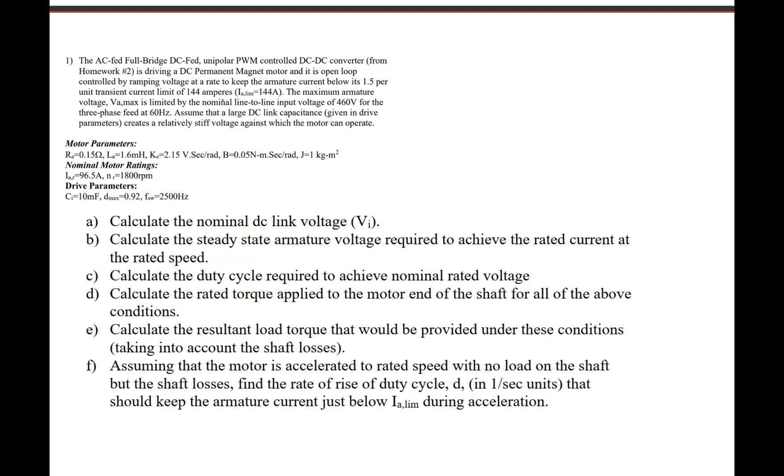When we want to limit the armature voltage because of the front end AC voltage, we can't exceed that, and we'll also want to provide some dynamic margin so that when we apply closed loop controls we can achieve everything that we need without saturating the PWM controls.

Now we also will be assuming a very large DC link capacitance. We provide that parameter right here at 10 millifarads. So that would create a fairly stiff voltage against which the motor drive can operate. So we have these parameters here, and we have these nominal ratings, and then we have these drive parameters.

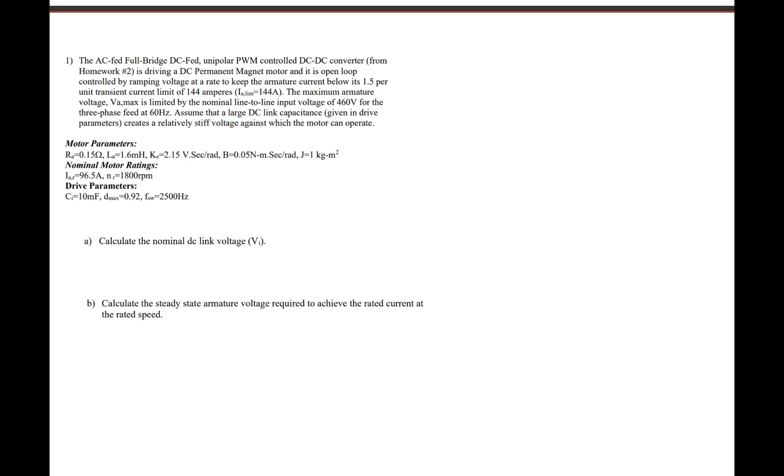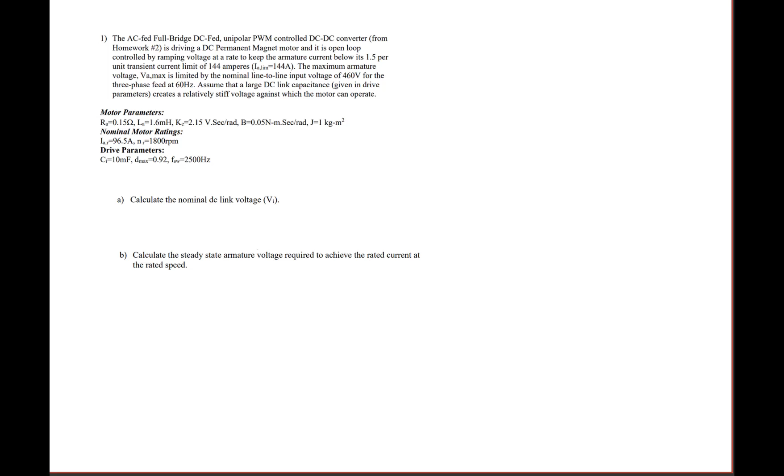So the first thing is, just a moment here, in order to find the DC link voltage, we would simply take square root of 2 in order to get the peak DC across the DC link capacitor. So that would be square root of 2 times 460, and the resulting answer is 650 volts.

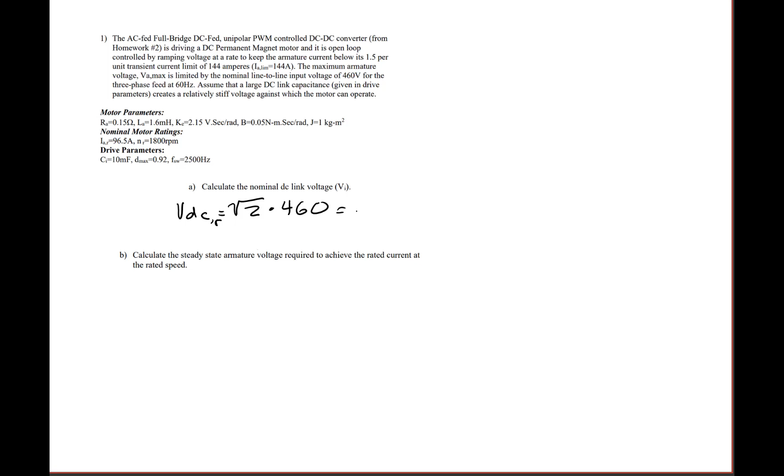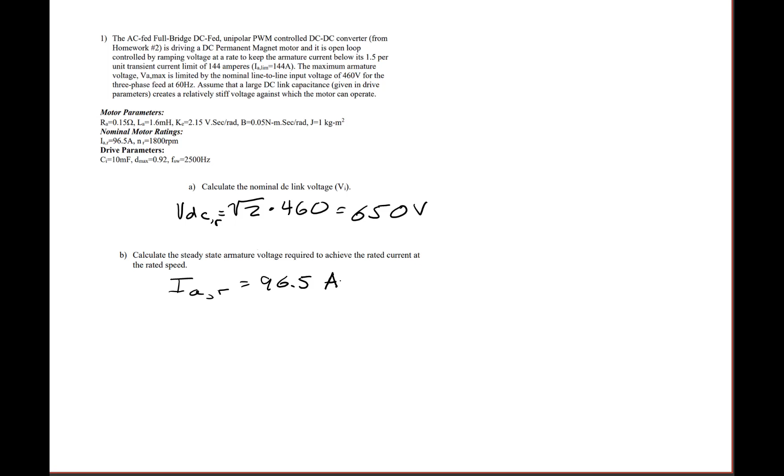Okay, so now let's go on to the second question asked. What is the steady state armature voltage that would be required to achieve rated current? So I'm going to list what you need to solve this problem. First of all, you need to know the rated current. That's been given. That's 96.5 amps. You also need to know the rated speed in radians per second.

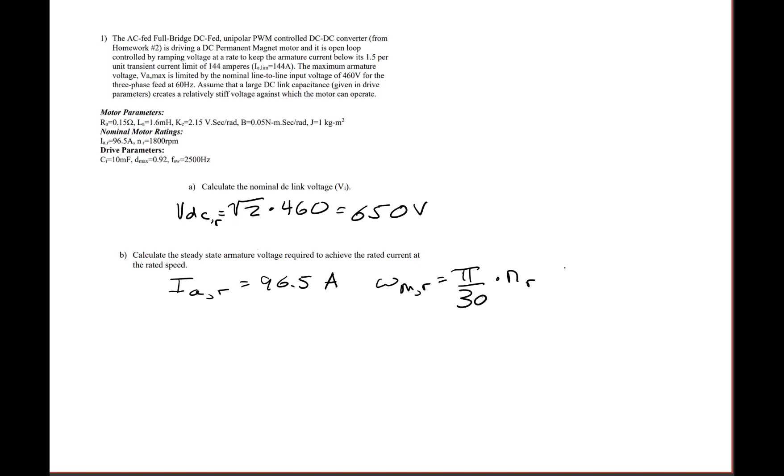So notice that we have been given the rated speed in RPM. So we need to convert that by taking pi over 30 times the rated speed in RPM, and that will give us 188.5 radians per second. So the expression for the armature voltage is the armature resistance times the armature current plus the back EMF voltage.

So let's start by finding the back EMF voltage, and that EA under rated conditions is going to be the back EMF constant K sub E times the rated speed. So we know what those are. We have KE is 2.15, RA is 0.15, and we've just calculated the rated speed. So that is 2.15 times rated speed, 405.3 volts.

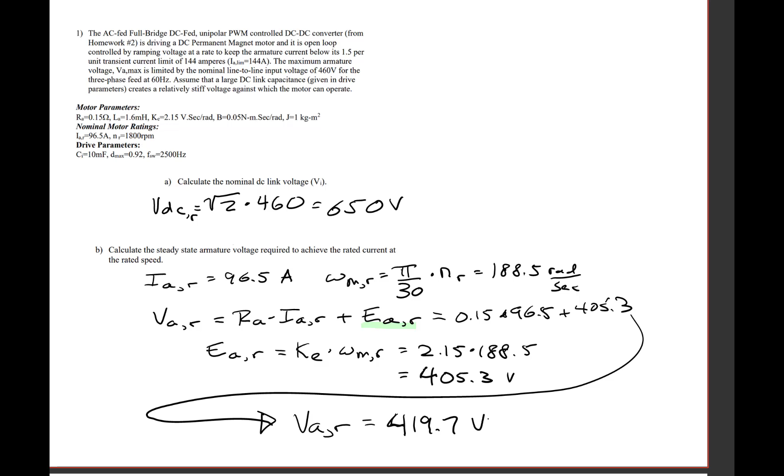Let me explain exactly what I mean about how to produce a voltage that would be applied to the motor that will ramp up the speed to, say, a commanded value.

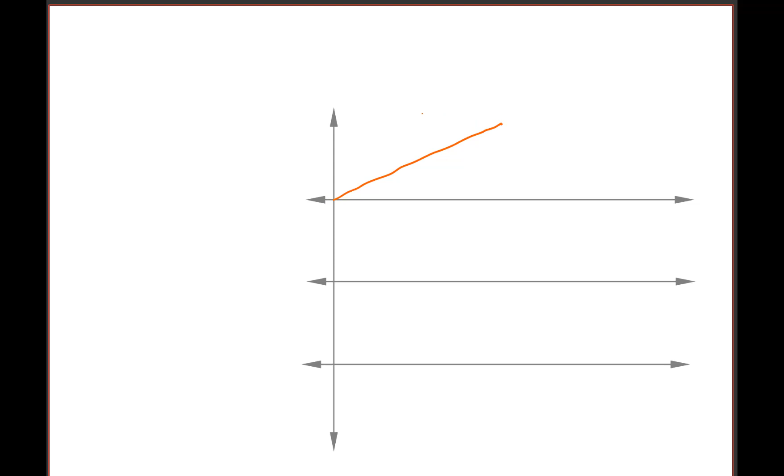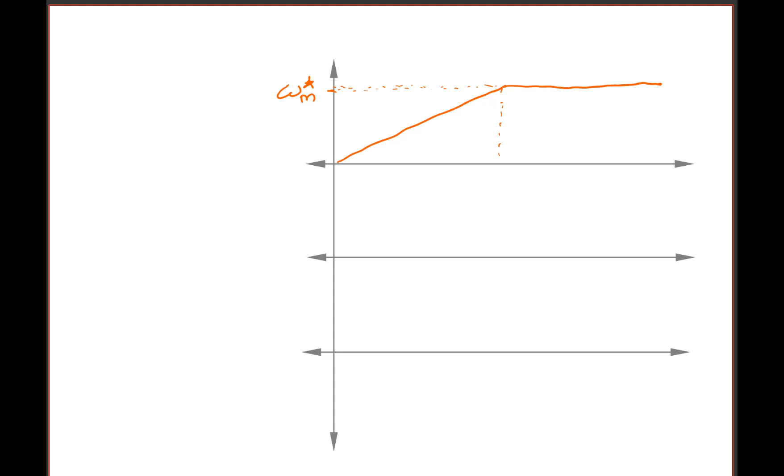So what we're really trying to achieve here is we want to start at zero speed, and we want to ramp up to this point here and then be at a desired commanded speed. And we're doing this without any closed loop controls. So this is what we would call our desired speed, omega m star. Now the time to ramp up to that omega m star, we could call that T ramp omega.

What would determine that time is to go slow enough to keep the armature current below our transient current limit. Here's the armature current here. Assuming that we had an ideal system, we could instantaneously get the current to go up to the limit, IA limit. And remember that this IA limit would be approximately 1.5 times the rated current. And then we would ideally hold the current there until this point is reached, at which time the current would drop down to whatever current would be required to achieve the speed that we desire.

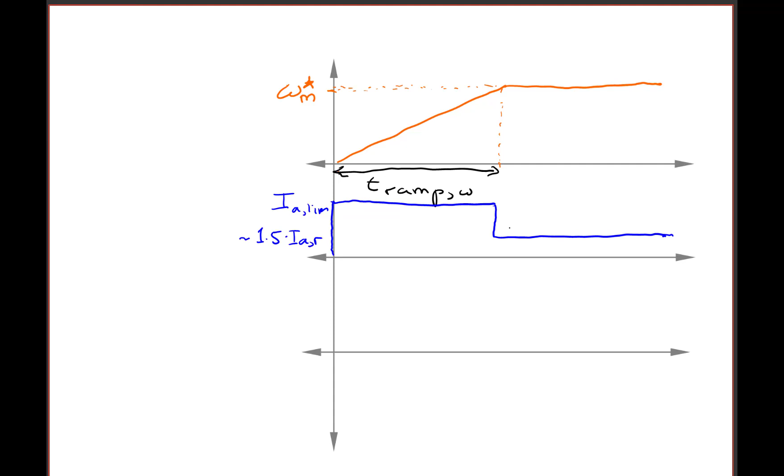So in this case, what I'm indicating is that in this period of time right here, we're at a steady state speed with some load. If we didn't have any load, then the current here would be dictated simply by the losses on the mechanical shaft. So you might have a very small value of current at no load, and it has to supply the shaft losses. So the question of how we get this is something that we need to answer.

The other thing is, why do we need a constant current? The answer to that is that we have a ramp that is linear. If it's a linear ramp, we're going to get to that speed as fast as, say under ideal conditions, if we could make the motor do whatever we want it to do, which you'll see that we can't. The closed loop controls will help us make the motor do what we want. But this is a linear slope of the rate of change of the speed with time.

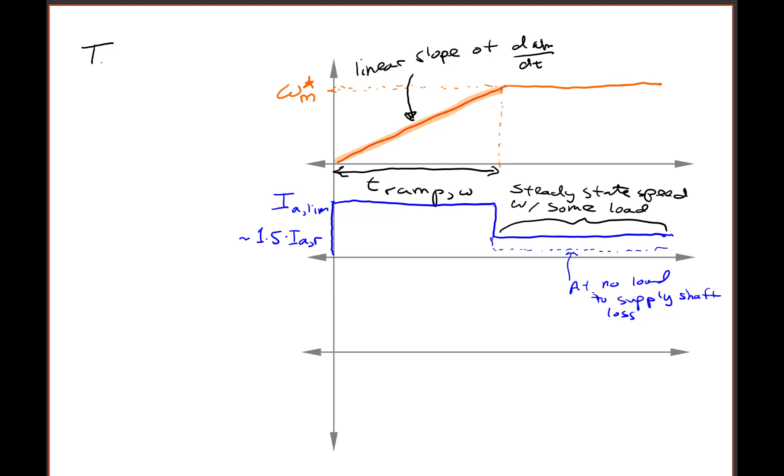We know that during this portion of the ramp, the applied torque to the shaft, TE, is equal to the total inertia of the shaft, and if we had a load connected, that would include the inertia of the load, times change of speed with time. Very simplistically, we could estimate that time if we assume that the numerator of this differential equation is just a change in speed. So in this case, the change in speed is from 0 to omega m star divided by a change in time, and that's the t ramp up time.

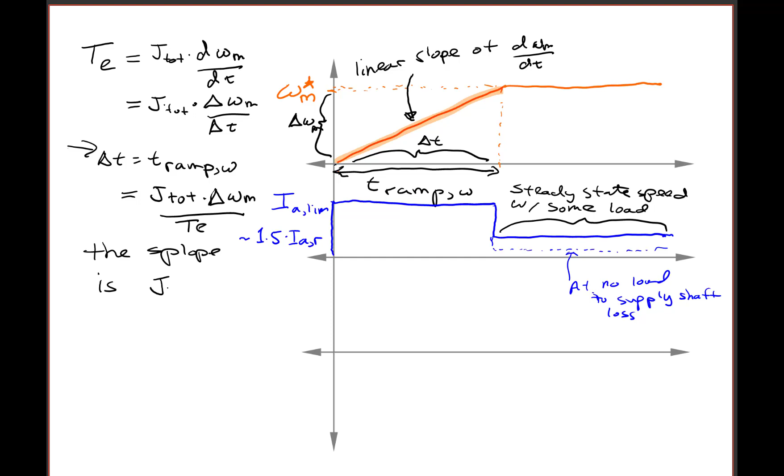So rearranging this equation, we have delta t equals t ramp up, and that would be equal to the total inertia times the change in speed divided by the required torque. And another way to look at this whole problem is that the slope is simply J total divided by the torque. We know that since we have a linear slope, such as this is omega m during that period of time, the derivative of omega m dt will look like a straight line. This is the derivative right here. So the idea would be to come up with a voltage command that would produce this kind of shape.

In general, IA would be equal to the torque that is required to ramp up the speed divided by the torque constant, K sub t. So that's what's happening here. We need to come up with a voltage command that will produce this current. And we're looking at this motor very simplistically. We're really not including the dynamics of the motor model other than our assumption that we'll have a constant slope. You'll see that having a constant slope is not going to produce exactly this shape. And without having closed loop control, there's really no way that we can keep the current below this ideal line and avoid going above this transient limit.

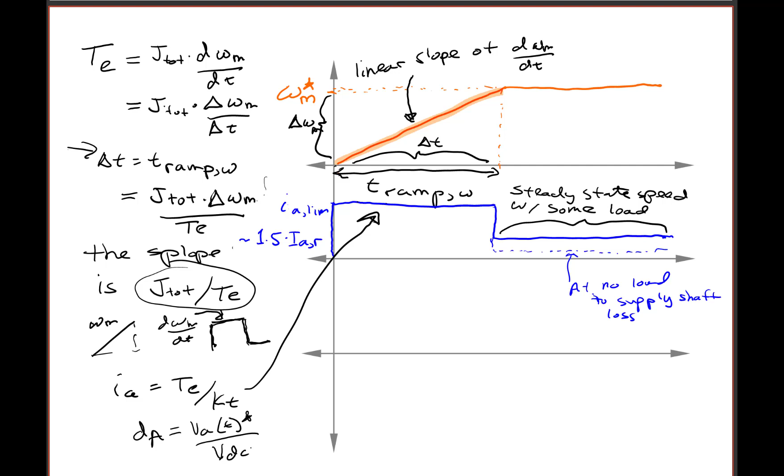But what we want to be able to do is come up with a voltage and ultimately a duty cycle command. So we have this duty cycle d sub a that we start everything off with, and that would be simply equal to the required voltage command that we need to synthesize. And I want to point out again, this is a time changing armature voltage command, and then that is divided by the DC voltage value. We're going to assume it's a constant here, and that's how you get the DA command.

So what we will end up getting with the approach we're taking is a voltage that will look just like the speed. Now once we hit the desired voltage that we're trying to achieve, we're at steady state, and the current that we're settling out at here is dictated by the load only. There's no transient involved.

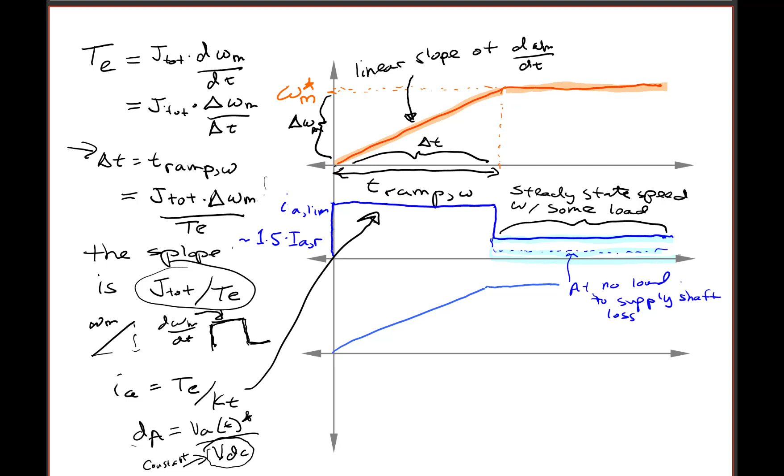If we had no losses, the current would go all the way down to zero at steady state. In our simulation model, we would apply a slope limiter. So we need to find the rising slope, or say d sub slope, that's the rate of change with time of the dA that we're commanding. So we will want to find this. We need to know T ramp omega, and we need to use a motor model to find this value of

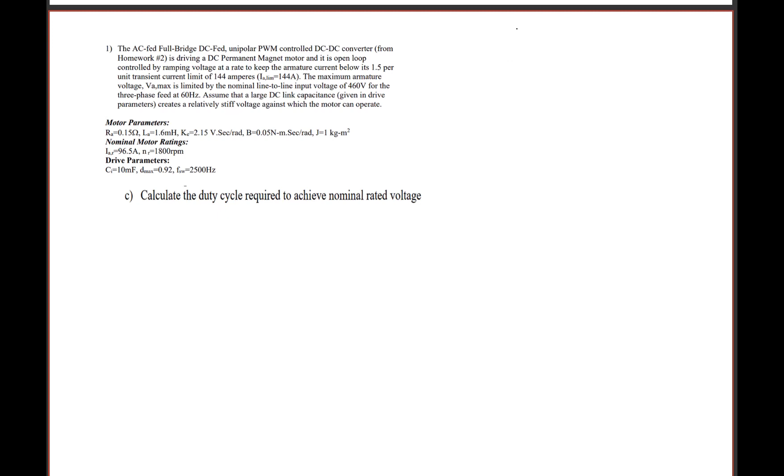d slope. So moving on to problem 1c, calculate the duty cycle required to achieve nominal rated voltage. Well, in order to find that duty cycle, we need to figure out what is nominal rated voltage. We've already found what that is, 419.7, and so the duty cycle is going to be dA for rated conditions divided by VDC rated, 419.7 divided by 650, which is

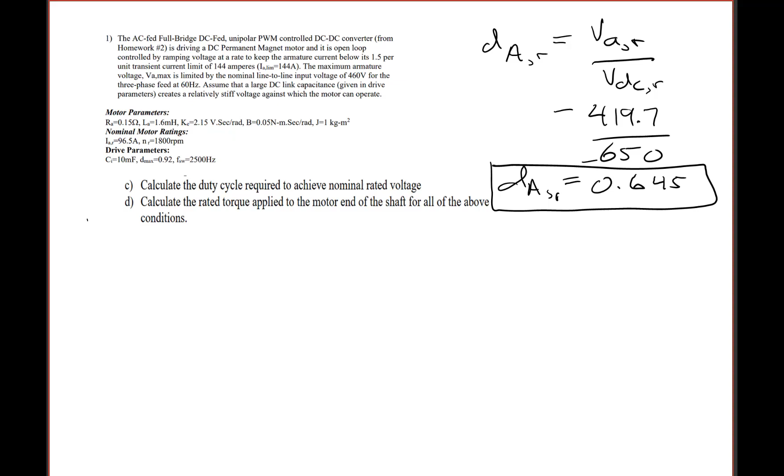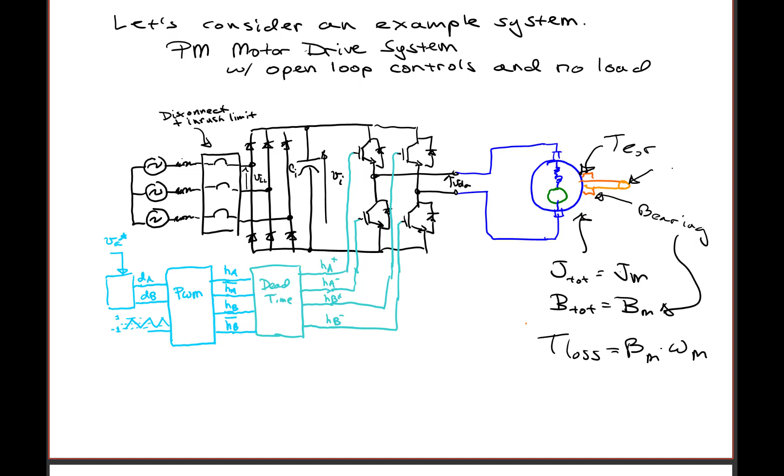0.645. Next, in problem D, we're asked to find the rated torque applied to the motor end of the shaft for all of the conditions described up above here. So let's look at what we mean. That would be what we're looking for. That is the same as TE rated. You notice that we have a bearing here, which is mathematically described this way, and there is going to be a loss, a torque loss, which is Bm times whatever speed you're at. That torque loss is at the end of the shaft here, so we would call that T shaft.

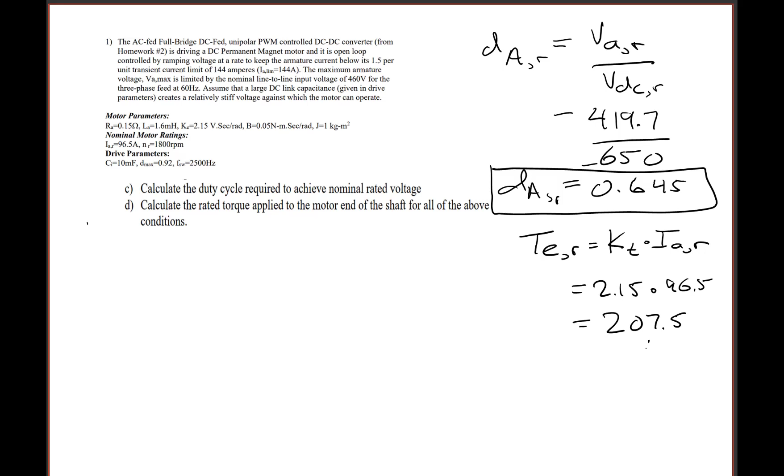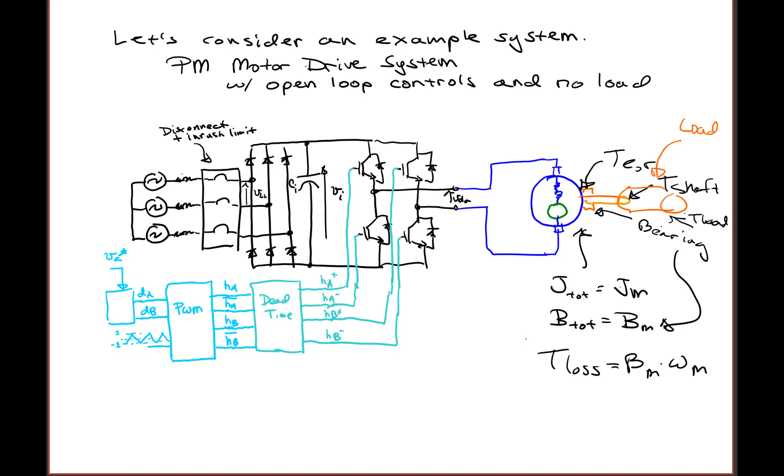We would have the TE for rated conditions as the torque constant times the IA under rated conditions. So that's 2.15 times 96.5, or 207.5 Newton meters. So the next question asked is to find the load torque that includes the load and then the torque at the end of the shaft. That would give you the total torque. This T shaft includes TER. So basically what I'm saying is that T shaft is equal to TER plus Bm times the speed.

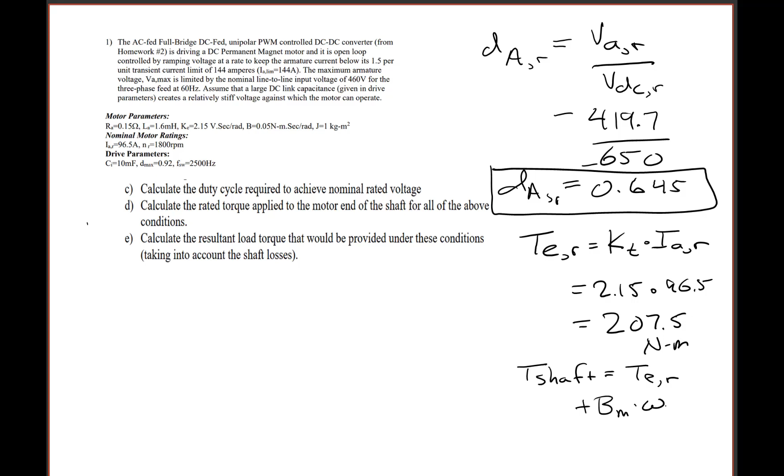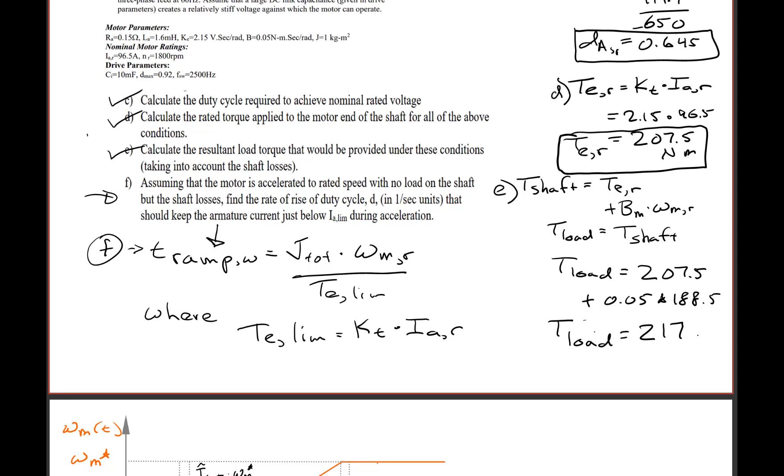Now we're going to be at rated speed here. And then the resultant load torque, T load, is going to be equal to T shaft. So plugging in what we know, the load torque under rated conditions is equal to the applied torque from the motor, 207.5, plus the damping, B sub m, which is 0.05 times the rated speed of 188.5. And the resultant load torque is therefore 217 Newton meters.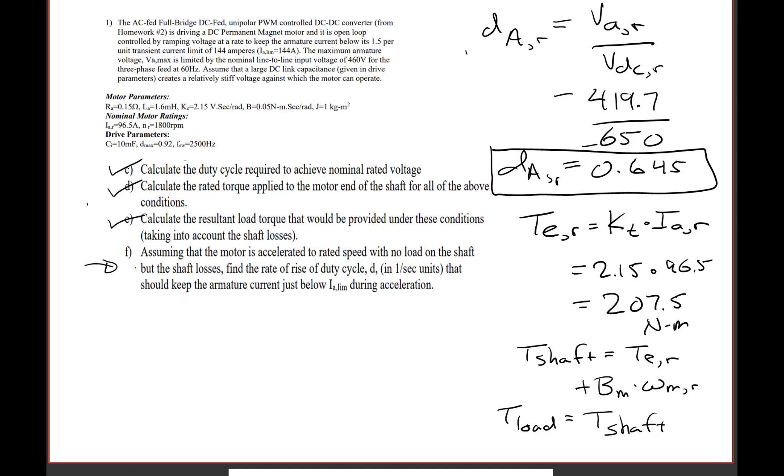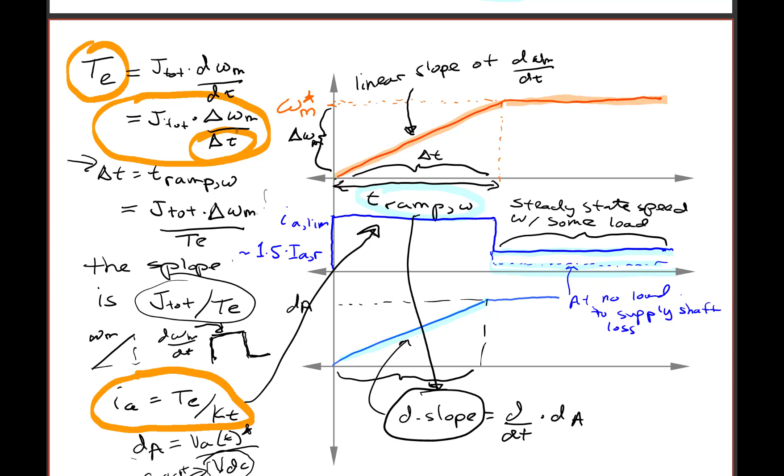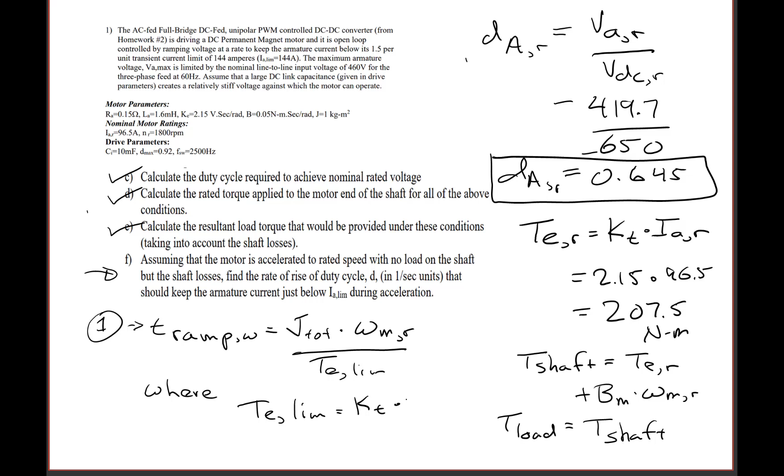So far we have done these three problems here. The final one is going to help us set up the simulation. And it's what I described here. And we're going to utilize this expression here to find the delta t first. So we already know that, and we know therefore we're looking for, as the first part of this, the time it takes to ramp up. That is equal to J total times the delta omega m. Well, that's simply the rated speed that we're trying to get to, divided by the limit torque. So we'll call this TE limit, where TE limit is KT, the torque constant, times the limit current.

Let's step back for a moment and describe what we're trying to do, and then I'll finish solving for this slope. Our desire is to ramp up the speed over a period of time defined as T ramp speed, and that should give us the slope of the speed of the torque applied divided by the inertia. And after T ramp omega, we will arrive at the commanded speed omega m star. Now the T ramp omega is defined so that the armature current does not exceed the level of IA limit. IA limit is 1.5 times the IA rated, which is 96.5.

So the resultant current for IA limit is 144.75. I had accidentally dropped off this 0.75 before when I set up the problem, but actually this is significant. You could even say it's approximately 145 amps. So the applied torque, or the torque limit, would be the torque constant times IA limit. That's 2.15 times 145 in this case, which is 312 Newton meters.

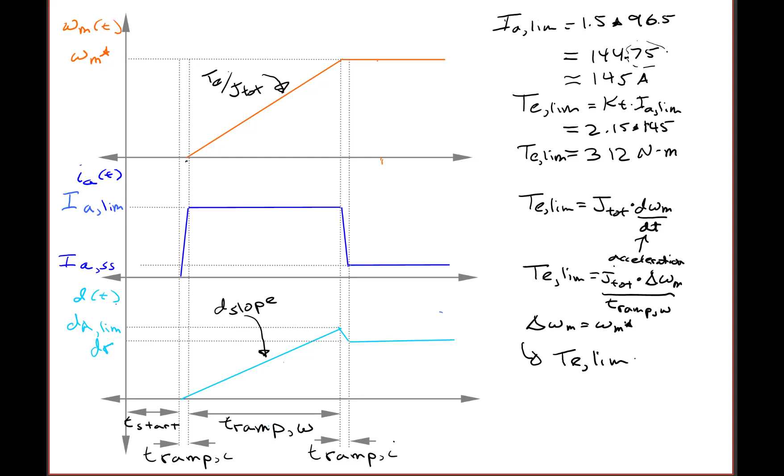So again, recognizing that the differential equation that would control the acceleration of the motor is TE limit equal to the total inertia times the rate of change of speed with time, or that's the acceleration. And as we said before, we can simplify this, find what we're looking for. TE lim being equal to J total times the change in speed that will occur over the time it takes to ramp up, T ramp of the speed omega. We know that delta omega m is equal to omega m star because we're ramping up from 0, and therefore the equation becomes TE lim equal to J total times omega m star divided by the ramp up time.

Rearranging to find an expression for T ramp omega, we have J total times omega m star divided by TE limit. So now we have everything we need to know to find that time. So J total is 1 Newton meter second squared times 188.5 radians per second divided by 312 Newton meters. And that is 0.604 seconds. And what we're after is we're wanting to create this trajectory for the duty cycle, which will feed into the pulse width modulation. And if we can apply this waveform of duty cycle, principally defined by this term d slope, we should achieve this speed trajectory here.

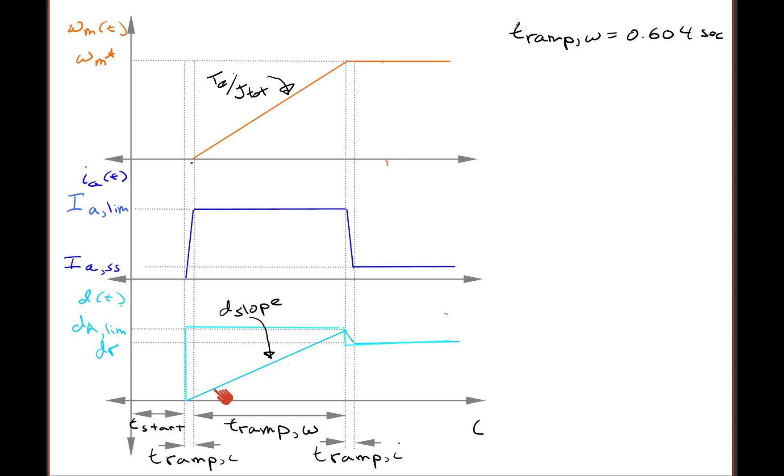So for a moment, let me explain how this could be done in a simulation from a top level, and then I'm going to take you through my simulation. What you do is you're going to start applying a voltage to the motor through the pulse width modulation, and the averaged voltage should follow this trajectory of duty cycle d of t, which is produced by starting with an initial 0 duty cycle, then commanding a duty cycle which I'll call dA limit. And we'll apply that for the period of T ramp omega.

Now how that gets applied that way is that we take these commands just going right from 0 to dA limit, and then when the speed hits omega m star, we'll apply another command that will drop to the rated duty cycle, and then we're at the steady state, and we're at the steady state speed.

But we can't just apply square waveforms to the motor, because there's physics involved here that will limit the rate of rise of current, which would basically be the delta I from, in this case, 0 to IA limit, over a ramp time, which is a function of the armature electrical circuit physics. Then we apply this constant current here, and basically this is probably the fastest rate of rise that we could apply to the armature without causing a resonant condition.

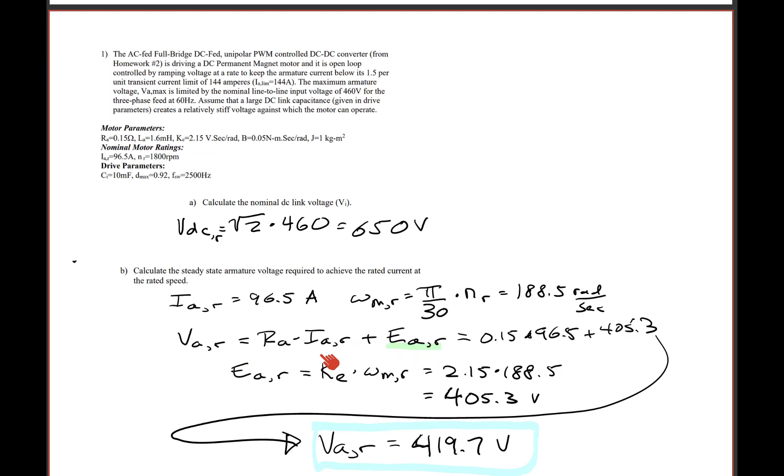So in order to find that, we need to determine what the armature voltage would need to be to achieve the rated speed. And we actually already know that. Recall that we calculated that armature voltage at rated speed using this equation here. Now this is a very simplistic way of achieving what we would call a voltage feed-forward trajectory. So the rated target point is right here. That would be the value,

that would be the duty cycle that produces 419.7 volts. But we need to find the duty cycle that would produce a voltage that should keep this current at the IA limit. We'd have VA limit equal to RA times IA limit plus KE times omega m star. And then DA limit would be equal to VA limit divided by VDC.

Now I want to introduce a nomenclature at this point. We can't know ahead of time and at all times the exact values of the motor parameters because they'll change, for example, with temperature. But we can estimate them. So if it's an estimate, I'm going to put this little hat over the variable. So there's R sub A, there's KE, and also we'll want to estimate the rated DC voltage, or we could just call this VDC rated as a parameter in our controller.

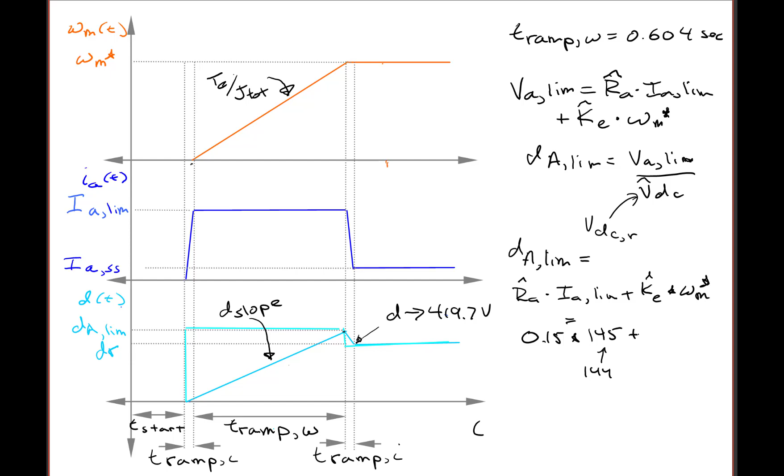So let's calculate VA limit and then DA limit, and then we're ready to calculate this slope value right here, which is what we're going to use in the simulation to limit the rise of duty cycle between 0 and DA limit. So plugging in the numbers, DA limit is equal to RA hat times IA limit plus KE hat times omega m star. And that is 0.15 times 145, or 144 is what I put in the problem, so we could also say that's 144, plus 2.15 times 188.5. This total quantity here is divided by VDC, which is 650.

So the final result for DA limit is 427 divided by 650, or 0.657. And the last step is to find the slope, and that will be the DA limit divided by T ramp of omega. So we know that T ramp of omega is 0.604 and DA lim is 0.657.

Therefore, D slope equals 0.657 divided by 0.604, and that is 1.09, 1 over a second. And that's our final answer to problem 1F.

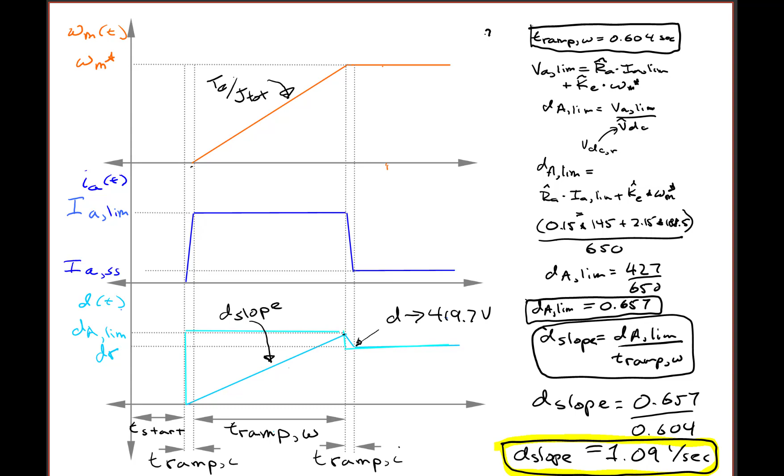So I'm going to now take you through the simulation that I have built to support this homework. We're going to skip over problem 2, which addresses the open loop and closed loop gains of the system, and just go on to problem 3, which follows right on with what we just discussed.

So we're here on problem number 3, where you're asked to develop a MATLAB Simulink model for an AC-fed, full-bridge, DC-fed, unipolar PWM controlled DC drive, having all the parameters given in problem number 1. It simulates ramping up to rated speed by ramping up duty cycle to the value found in problem, actually it's 1F, not 1C here. Apologize for that.

And you can use this to verify all the results of problem 1 through all of these problems here. I have to go back and review why I said exactly these numbers, but it's pretty straightforward down here. This is what you want to do. Also I asked you to provide simulation results in PDF form.

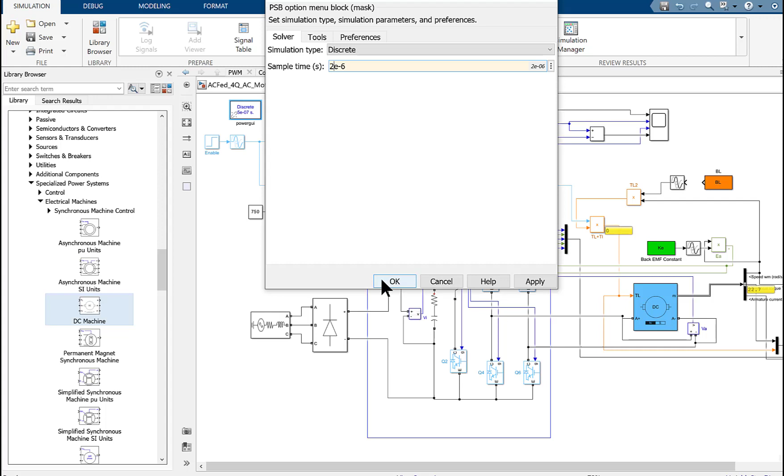In the Power GUI, this thing is going to run faster if you use the discrete type of simulation solver, and a sample time of 0.5e-6 would give you a more than sufficient resolution for any simulation that has power electronics. But I'm going to even try to speed things up by changing this to 2, and let's see what happens there. If it doesn't, I'm going to go back to 0.5.

I set up a stop time of 1 second. This is after a lot of playing around with this thing, and that's really what you kind of have to do to get your simulation right. There's a lot of messing with it. It's not just a simple thing to spend 1 hour on. I would expect getting the simulation working the first time, and to really get it working correctly, it would take you several hours. It took me several hours to make it work in a satisfactory way.

I don't expect everyone to get the exact results the first time. But I do expect you to have at least set it up to have the ramped voltage being applied to this motor. The other thing is, okay, in the modeling tab here, you want to set your model up.

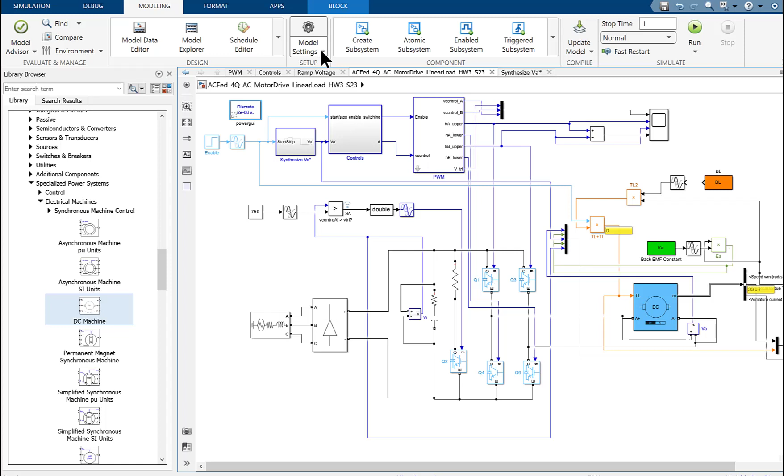The model settings really control the simulation solver. You're going to want to have a stiff solver, and so what you would pick is a variable step solver using the ODE23TB stiff solver. If you pick these other ones here, it's going to take a long time to run.

So you want to take ODE23TB, and I haven't ever used these two here. I don't have this one. You wouldn't use it unless using Simscape. I'm not sure about this one here.

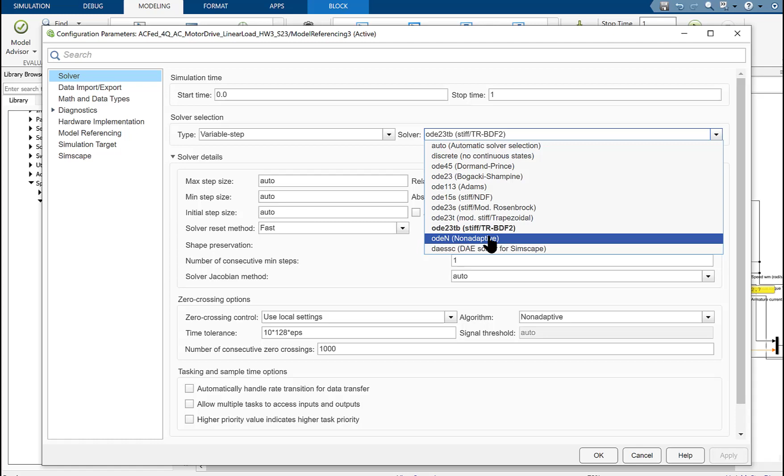But what I do is I set it up here, and then I set the GUI. You could set it to continuous right here, but it would take much longer to run. So discrete is more efficient. I hope those are little tricks that will help.

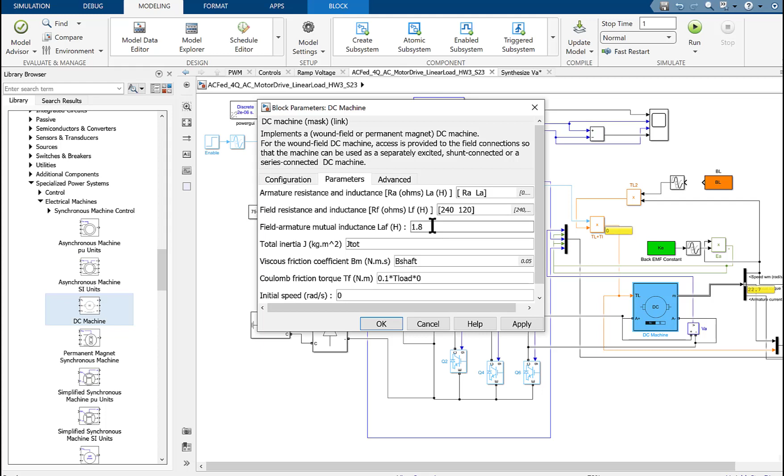I want to talk about the motor here. So this is a permanent magnet motor, and I expect you to pay attention to that. It has field type. If you pick the wound field type, you're going to have to come up with extra parameters, and you're going to have to apply a field source. It's challenging to get all these parameters right. I really still don't know how to do it correctly.

And the problem with any simulator that uses components that they have set up themselves, it's hard to understand what's under the hood. You can go under and look and figure it out, but I've not bothered with that because to me, simulating the field is going to cause a really long simulation time if you're going to do it correctly, and I don't want to mess with that.

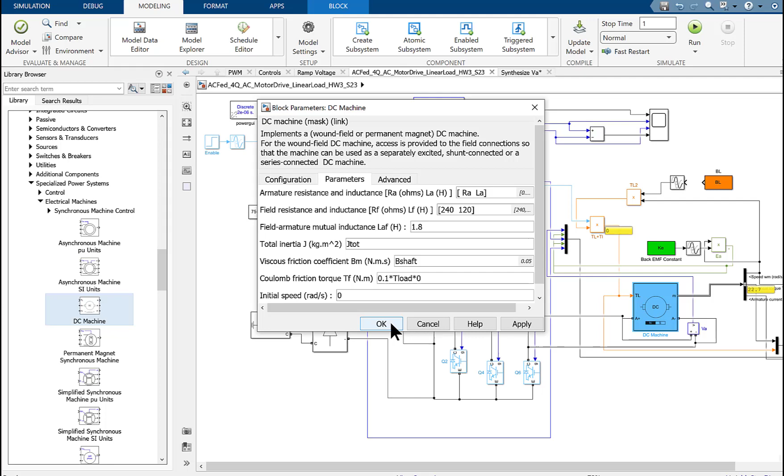Okay, so if I hit this, what I'm talking about, if you hit OK, now the field winding appeared, and you'd have to apply two sources, one for the armature and one for the field. But we're skipping that. We're going to the permanent magnet field type. If you look at the parameters, then everything that was in the homework you can enter in.

There's a little nuance here that you can decide. You remember, let's see, it's right here. You remember that I said that if you're using SI units, torque constant KT and back EMF constant KE are the same number. But if you pick back EMF constant to enter as your parameter, it's going to put it in volts per RPM. So you would be putting in a different number than the torque constant.

And it's kind of weird because this is an SI unit and this is a mix. Actually, it's not even SI. I don't know what uses minutes. This is typically what you'd find on a data sheet, though, volts per RPM. But I didn't want to hang you up by going through that a lot in the class.

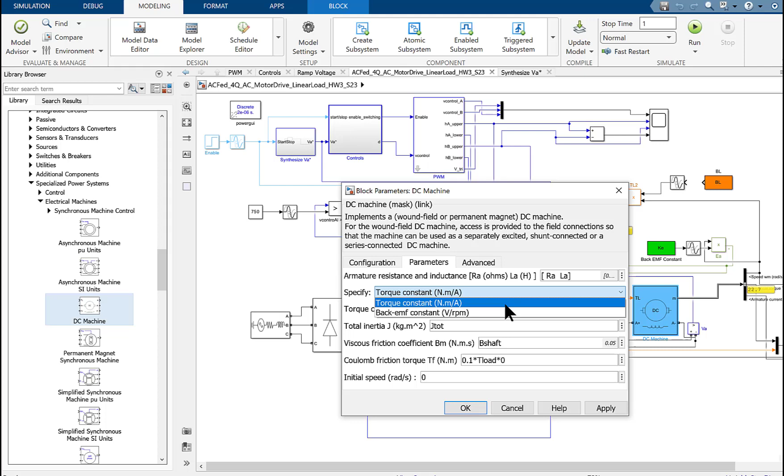Okay, so we have our machine. Everything's set up here. Let's look at how I did the synthesis of the voltage ramping, because that's really what this homework problem number 1 and this lecture is all about. So this sets the enable time, the time to start the motor. You could set start time to 0, but I always give a little bit of a delay.

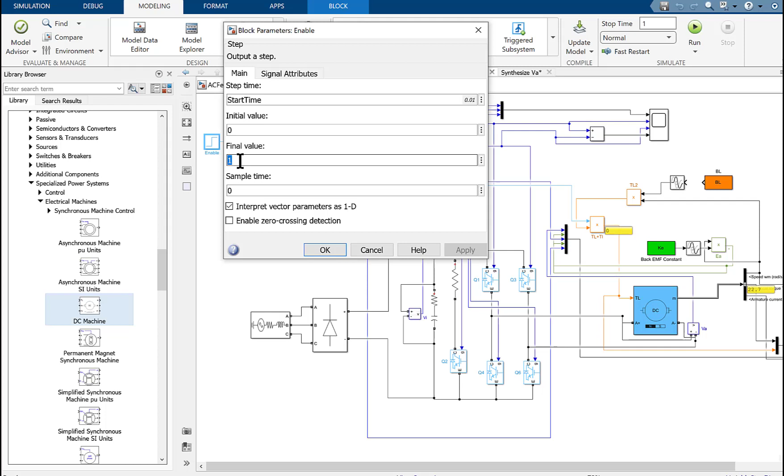So I have a unit function here, or a step function. It outputs a step from 0 to 1. I could have put this step from 0 to the duty cycle that I'm trying to achieve, but I would only really be able to effectively do it this way at this side of the simulation for one step. So I'm going to show you how I would do multiple.

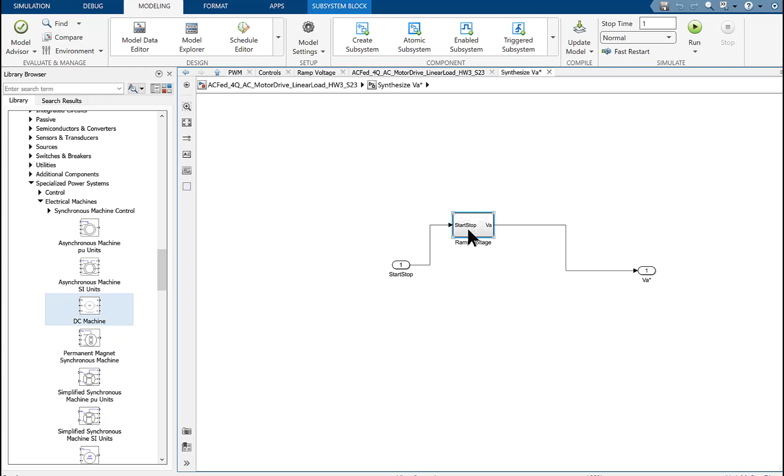First of all, this is an enable. It's not controlling the waveform. It's a time at which you say, okay, let's start executing the pulse width modulation. This is like an enable, it's like a start signal, and then this same signal enables the pulse width modulation, and then you can start producing pulsed waveforms. So here's where we synthesize this, and I'm going to compare two different ones in another, probably the next lecture.

So what I do is I say, okay, we bring in the start-stop signal. Everything's 0 coming out of here until I get to this point here, and I'm multiplying. Now what I had to do ahead of this is any signal that is a step, for some reason it can't really produce a signal that you can do math on. So I add this transport delay.

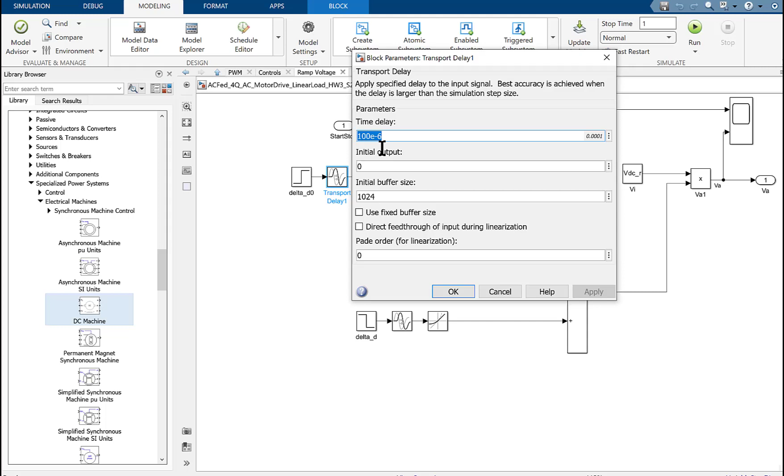It's say 100 microseconds. That would correspond to the propagation delay of your microprocessor or digital signal processor, whichever one you're using. 100 microseconds is a decent number to assume there. And then what I'm saying is this is the first part of the square trajectory that I'm applying to my controls.

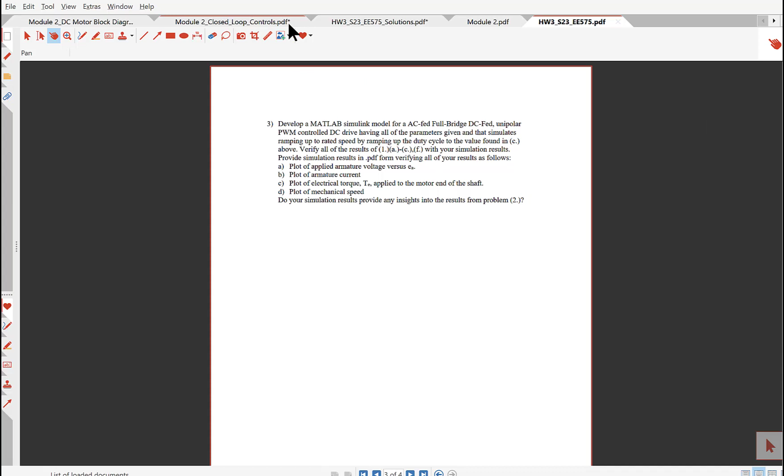Now remember what I mean by that. Let's go back to the description leading up to this. So recall that I said you're going to step. This would be what I'm calling dA star in the simulation. I'm going from 0 to dA star.

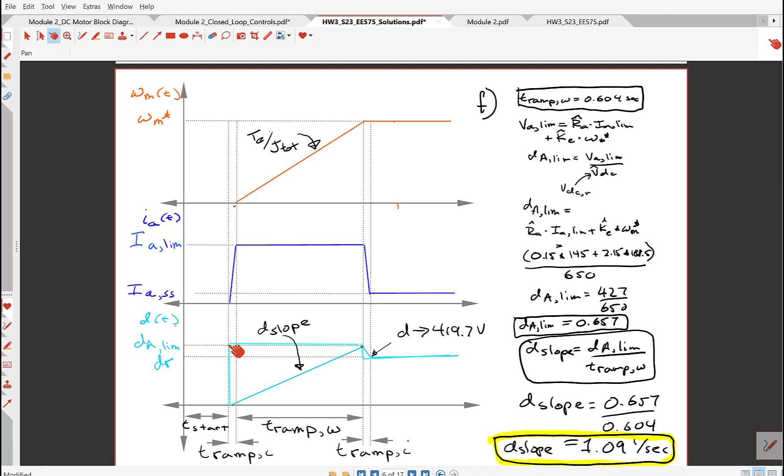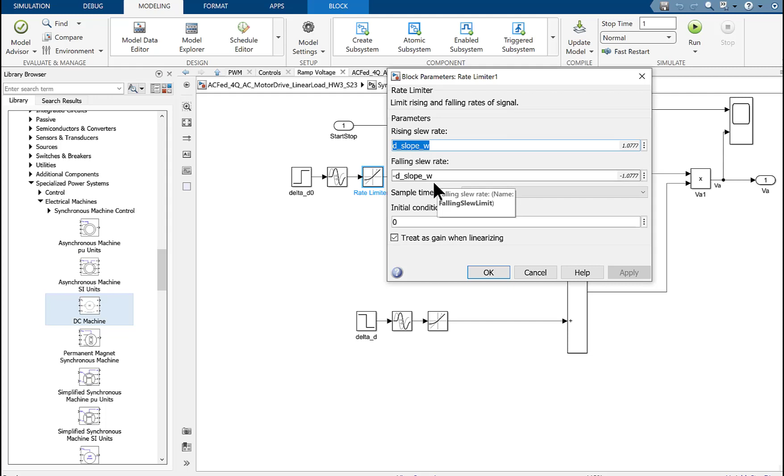Okay, so going back to the simulation, I'm going to apply what comes out of this. This has to go through this transport delay to the rate limiter. And this is where we put d-slope, or I'm calling it d-slope omega, because I also came up with a d-slope I, which is the fastest slope that you can really apply to the motor. This one is a relatively slow one, derived from the ramp-up time.

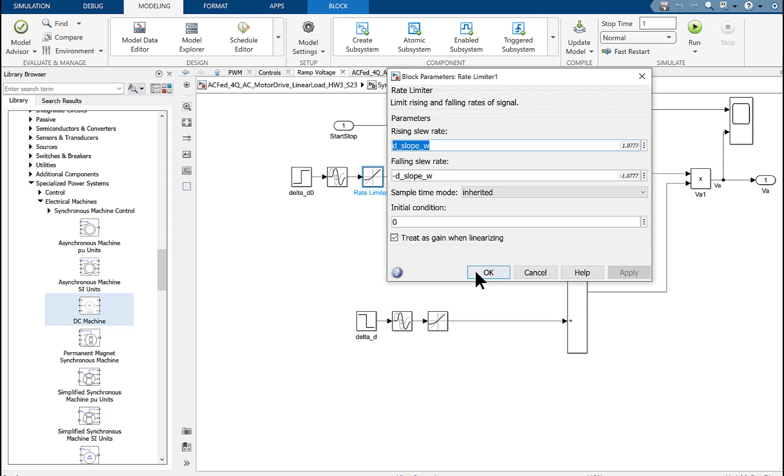So it gets multiplied by the start-stop signal. This will make this go from 0 to the D star command, or the DA lim command. So one thing, maybe actually this is mislabeled. I'm going to call this DA lim, so it matches the simulation. Okay, then I'm going to put this signal out here, but then I want to create the other.

I can keep adding changes in command, and the next thing that I will show you is how to create, say, ramping it up, ramping it down, ramping it negative, doing full 4-quadrant behavior. But I have to come up with a delta D, and all of these are calculated in a MATLAB callback function. It's start time, but it has to add to that the T ramp up time that we calculated. And so at that point, this

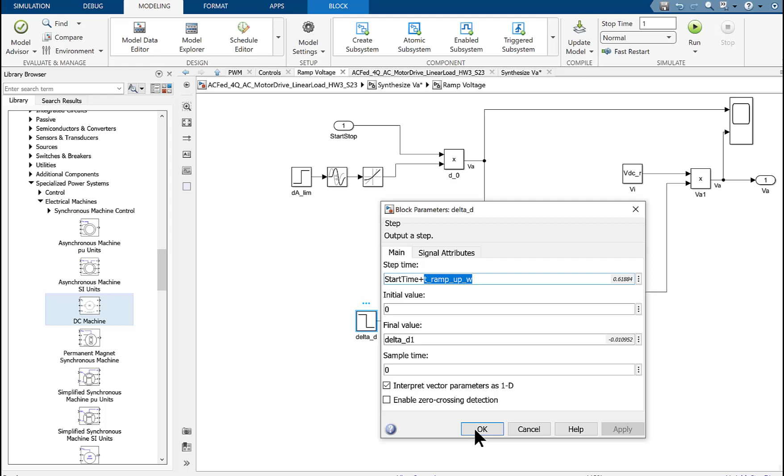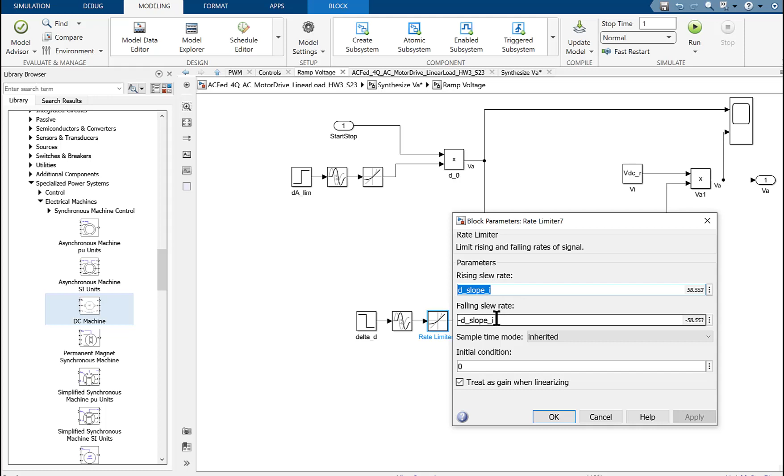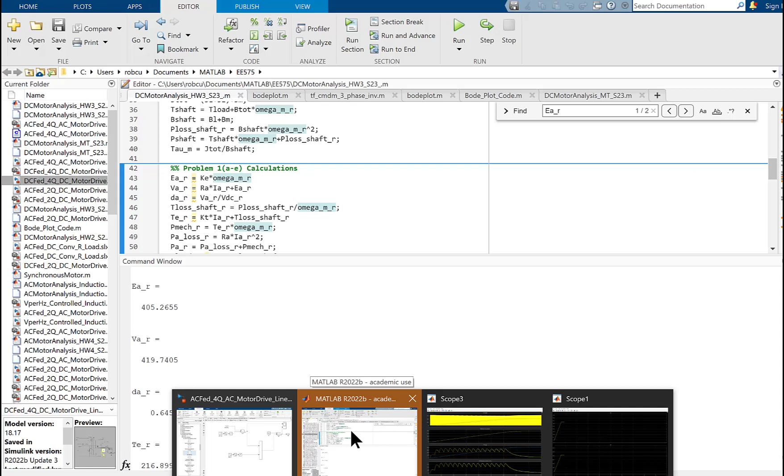here will add a little delta onto the prior command trajectory, delta D1. And then I'm going through the D slope I in this case, which is the fast slope. These add together to create the entire trajectory, and then I multiply it times the rated DC voltage to give a commanded armature voltage trajectory, which is shown in here. And now I'm going to show you my MATLAB.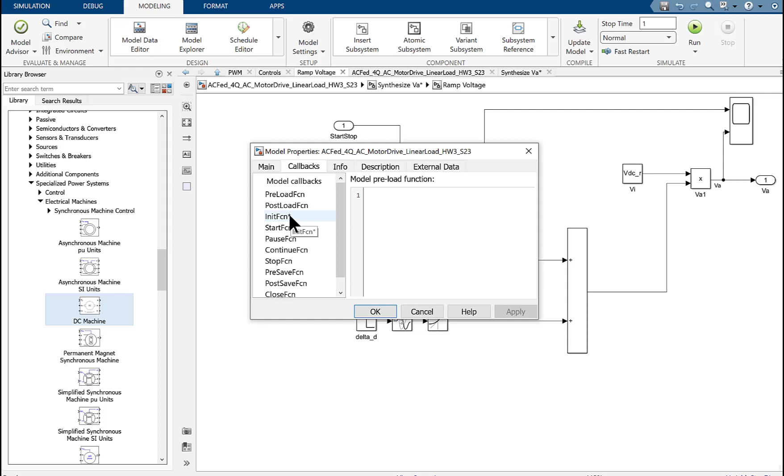Well, first let me show you this in the simulation. One more thing I do in the model settings is I go to the model properties and I have callbacks that I define. So what that does is you can actually automatically execute a MATLAB function. I don't really know the difference between init function and start. I think we could put what I'm going to show you in either one of those, but there's different functions where you call MATLAB code.

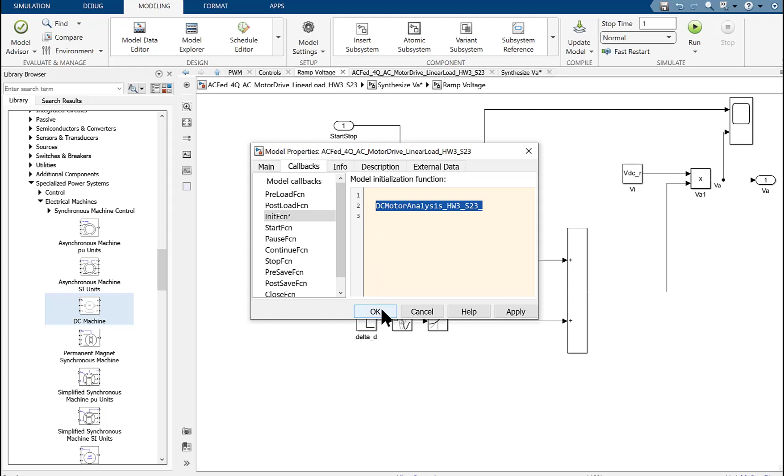So when we initialize everything, actually this simulation step I'm not using, so I'm going to take it out. I don't think I'm using it anywhere, but we can double check that. And then I'm calling this MATLAB function here. Okay, so the MATLAB function is this right here. I wrote it and I do all the calculations here.

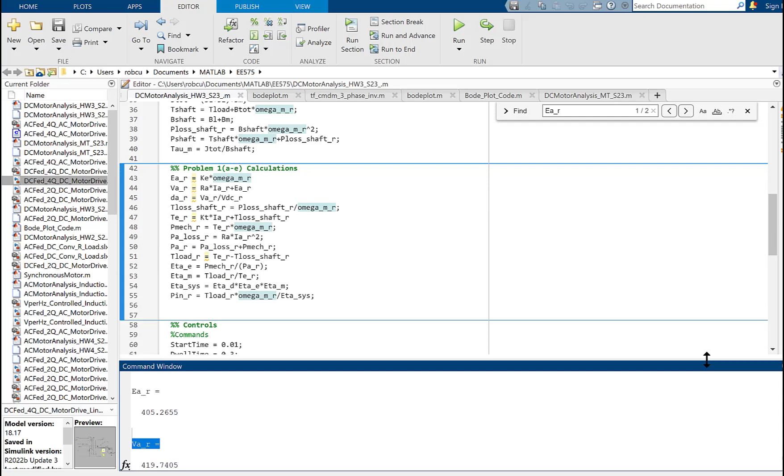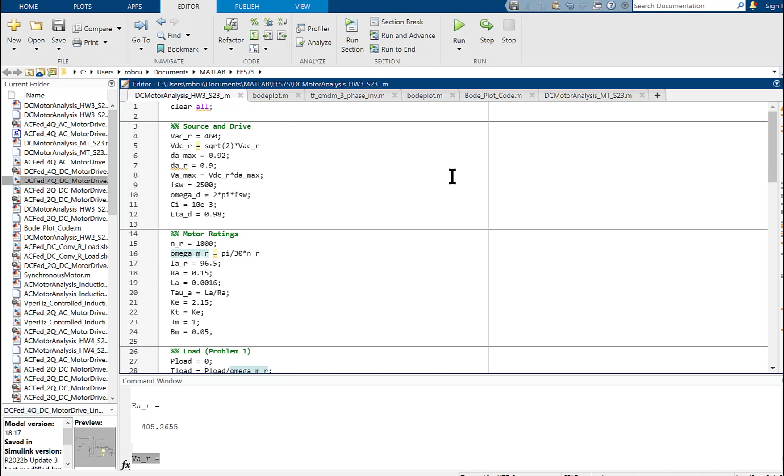In fact, you can do your simulations. You can come up with the answer, say, to problem 1. And that's what I did in this MATLAB file here so that I didn't make any mistakes. And I'm going to post this on Canvas. So basically I wanted to show you, here I do all the control commands, and I have a VA star 1, which is ramp up from 0 to basically get the speed up to rated with our feed forward trajectory.

This one is to go down all the way from the rated to 0, but I haven't done anything with that yet. This is the IA limit, but I'm going to change it to 145, although you'll see that it's not going to make any difference in the end. And I find the time to ramp up on the speed. Where is it? Here it is. T ramp up speed. So this is exactly the equation I described. This is what I was calling TE lim, but in this case I'm calling it TE star 1.

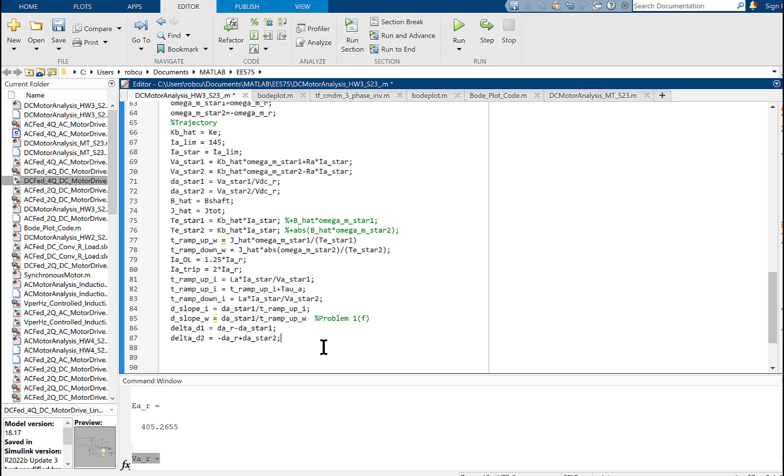And then there's also a time to ramp up or ramp down the current, and that is based on L di/dt. Okay, so I get the ramp there, and then from that I come up with a d slope of the speed. It's the dA star 1, which is calculated here, and the t ramp up omega, which we calculate right here. And then the slope of the current is d star 1 divided by t ramp I. Okay, so you can see everything that's in this file,

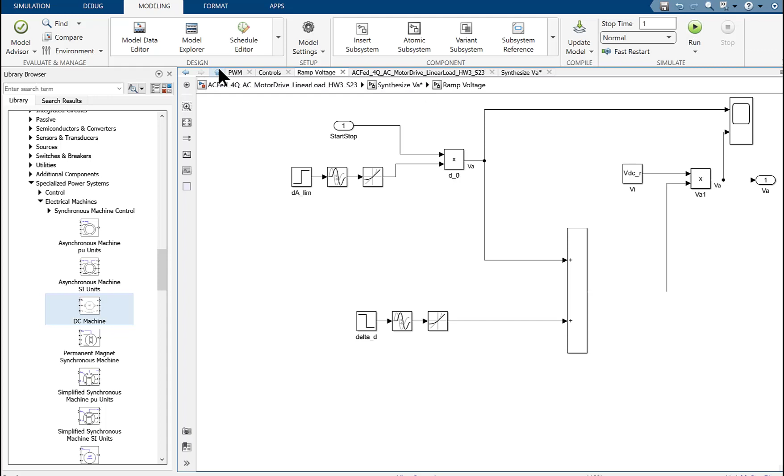and I'm going to have to stop this part of the lecture at this point and give you a part 2 because I've run out of time. But I'm going to just try to run this thing and make sure it runs. So I'm going to just hit, and basically just also show you one other thing. So all of this is in the synthesize.

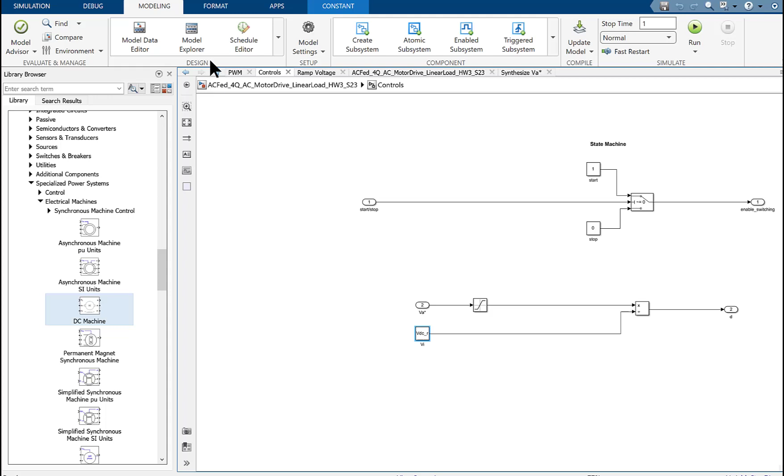In the controls, we're doing open loop, so there's really nothing in here, but there will be a lot more when you add the closed loop. So this is just creating an enable to do the pulse width modulation and start switching, and then this is taking the voltage command and actually dividing it by VDCR to get the duty cycle. Now we could have skipped this step if I hadn't multiplied the thing earlier. It's just a matter of style, and I'm just trying to separate out the separate blocks here.

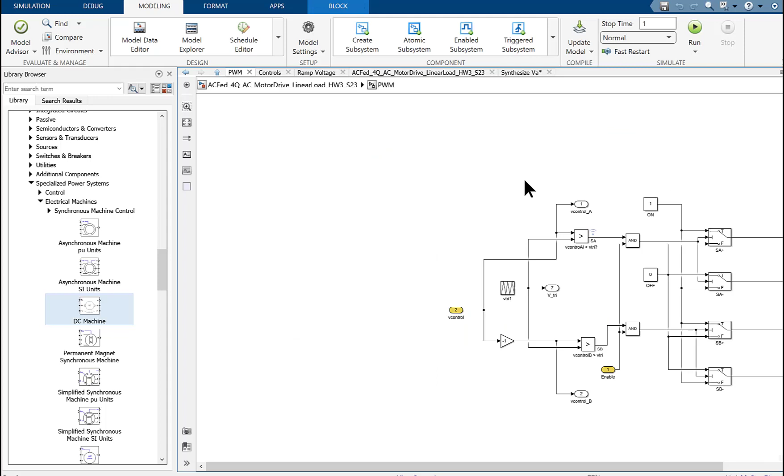And then these are the gates. This is the pulse width modulation. This is what you should have done in the first problem, homework 2.

It should look something like this. It produces the 4 signals that go to the devices here. We have the DC link. I also have a dynamic brake, which we haven't been able to talk about yet. Hopefully I can get through all the rest of this in one more lecture, and we can then pick back up on the AC motor drives.

And then the motor, this is my source. This is the load, which we don't have connected yet, but I'm going to show you that in the next recorded lecture. You can see the whole simulation. This is the scope I would look at my results for. So let's run it, and hopefully it executes. If it doesn't, I know why. So let's see what happens.

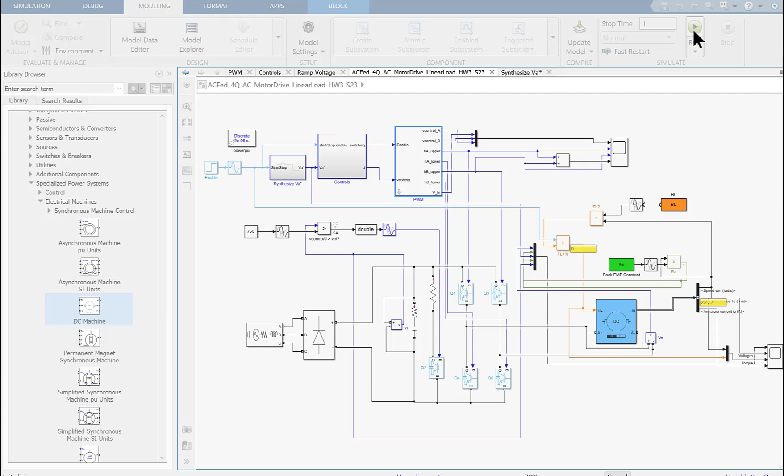Okay, it looks like we're in good shape. There we go. Okay, so everything was successful, and I can click on this scope and we can see at least the start of the simulation. I think I removed a couple of signals here. Oh, there we go. Okay, so this is the startup time. I have my speed. Yeah, there we go.

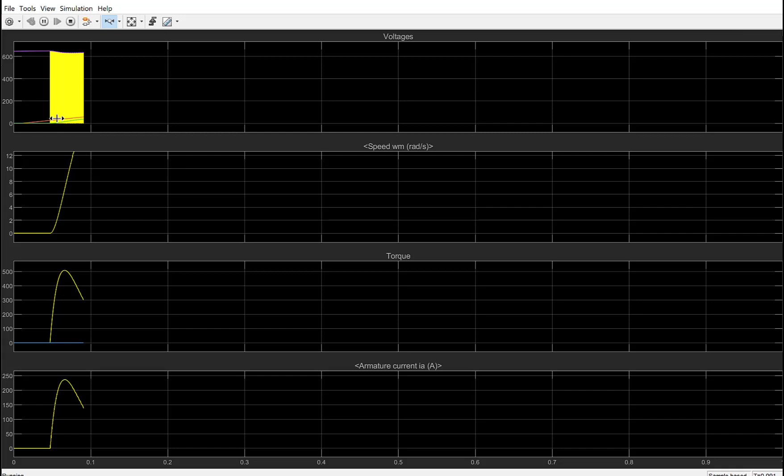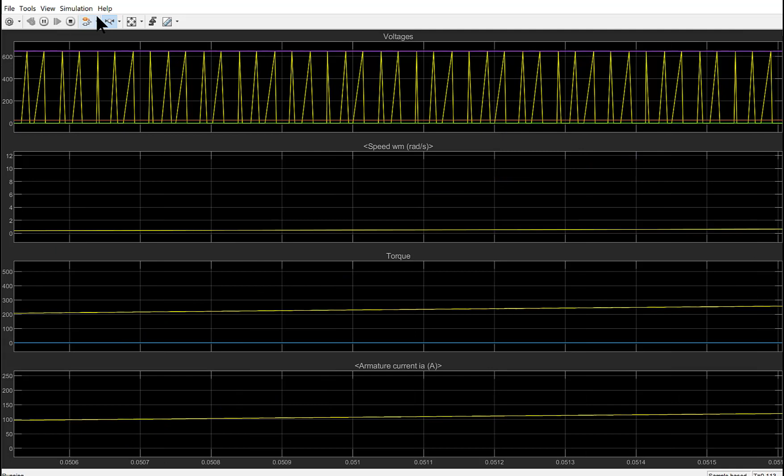Okay, so the orange signal here is not the VA star, it's the actual voltage of the armature. So this orange signal is the armature voltage, and the green signal is the back EMF, and it would actually track with the speed. So you can see that everything's ramping up here.

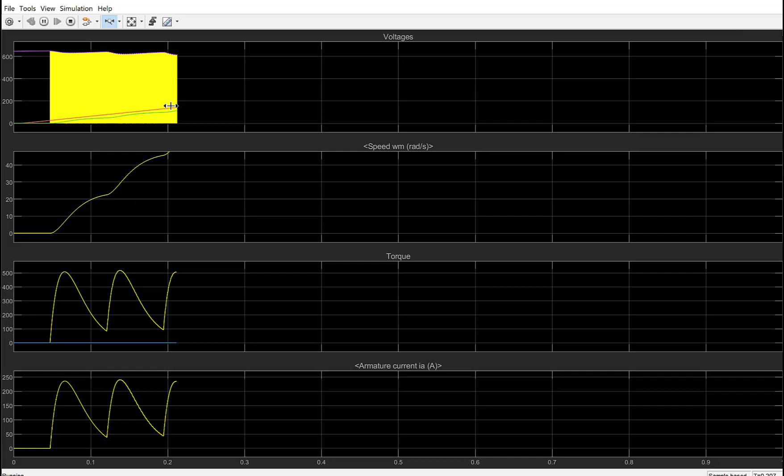At this time right here at 0.6, well, it's right around here because we have this delay. It's going to reach the rated speed because we pre-calculated the ramp time, and then we are going to quickly drop the duty cycle back. In the case of this simulation, we don't have a load at all, so the duty cycle is simply going to be calculated from the back EMF without any voltage drop. So basically it was all pre-calculated ahead of time, and you can see that the speed is heading up.

But this is the important point, this is the current here. What we wanted the current to do when we started to switch was to go up to about 144 and be flat. Well, it's not doing that. It's overshooting, coming back down, shooting up again, up and down. This is a resonant behavior that has to do with the resonant frequency we're going to calculate in problem number 2. And the only way we can fix it is to have closed loop control on the armature current.

This blue line here is the load. We're at no load, so it's 0. And we're heading up there to where we want it to be. Let me just see if we can wait a few minutes and get to this point here.

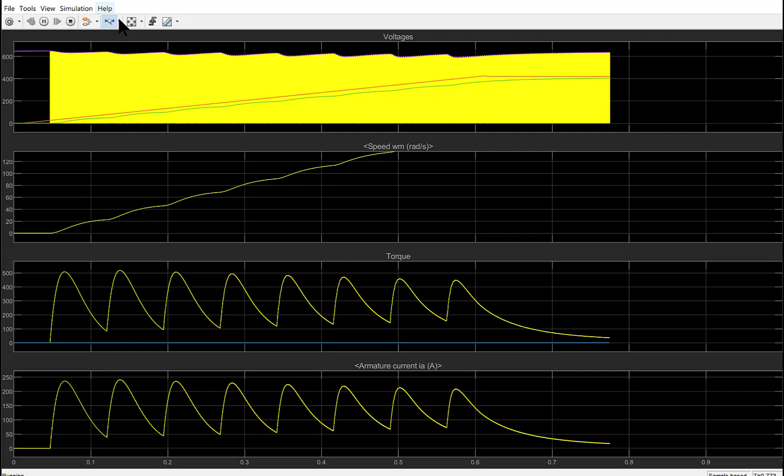So you can see that there's some delay. It's not happening as fast as we expected, but we start to come down towards the no load current right here, just before 0.7 seconds. We were expecting a time of 0.604 from our startup time, so the speed should have hit 188.5, which is this speed right here. Let's zoom in on this.

See, the duty cycle is heading up to the DA limit, and then it's going down to the D command, which is the duty cycle we calculated that you would need under rated conditions. We still want that duty cycle because it corresponds to the speed that we want. We're a little bit over, and I think that might be because of the way I calculated things. But this is all open loop, based on a pre-calculated feed-forward trajectory with a lot of estimates in it. It's not the real model.